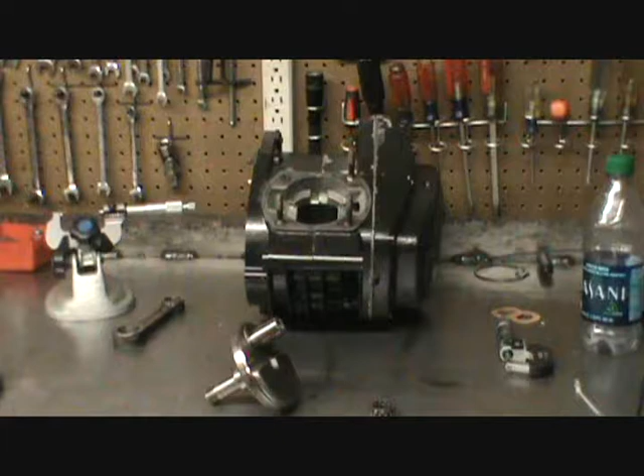My name's Steve. Today we're going to get started on our Can-Am 125 engine. I've already got the engine took apart. I wish I could have made some videos on that, but I'd already took it apart before I got into making videos, so this is where we're at right now.

I've took everything apart and cleaned it, and I started on the crankshaft last week. I was going to take it apart and put a new crank bearing and a new crank pin in, and check the rod journal to see if it was worn any. Well, I ordered a crank pin, found the right size and length, and a new crank bearing. So the rod, I measured it, and it miked out well within spec. It's hardly worn any at all.

So I just done a light honing, just to smooth it up a little. But the rod is actually in really good condition, so we're going to go back with this rod because Can-Am parts are not that easy to find. A rod, if you could find it, no telling how expensive it would be. So I'm glad that the rod was in good shape.

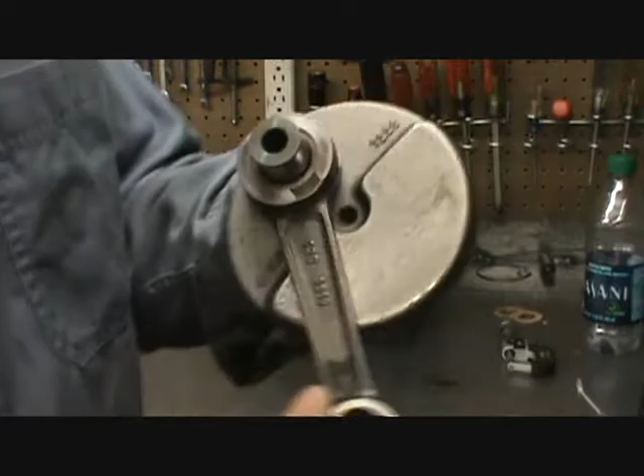Well, the problem is, I went to put the crank back together, and I noticed that the rod was rubbing on the side of the crank web. You can hear the noise, and let's see if that'll focus. You can actually see where the rod has been rubbing, see how shiny it is.

I noticed that there was no thrust washers on either side of the connecting rod, which is very unusual. Most all two-strokes that I've ever seen have had thrust washers on the side of the rods. So I thought, well, that was unusual, and I knew this right here couldn't work, because you can actually push the rod, and the rod will actually lock up on the side of the webs on the counterweights.

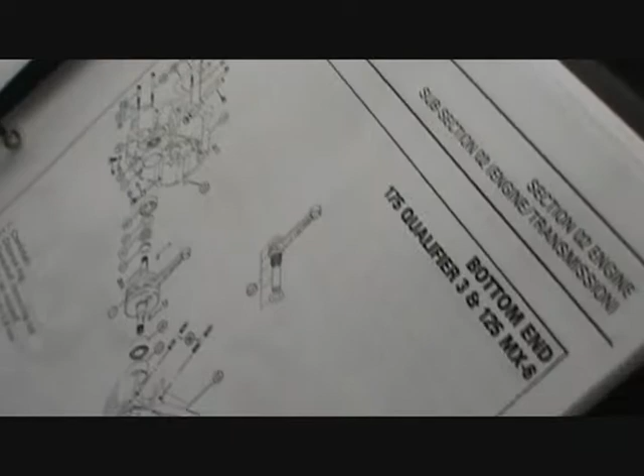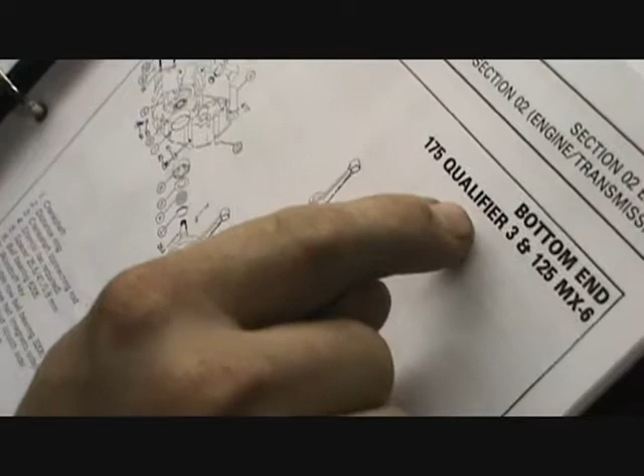So I found a service manual on the internet, and I bought it from a guy in Texas that deals with Can-Am parts. I looked in the breakdown, and it does have thrust washers, where it's supposed to have thrust washers. Let's see if we can get that to focus, and you can see right there that there are thrust washers on both sides of the rod. This is for the 175 qualifier and the 125 MX-6.

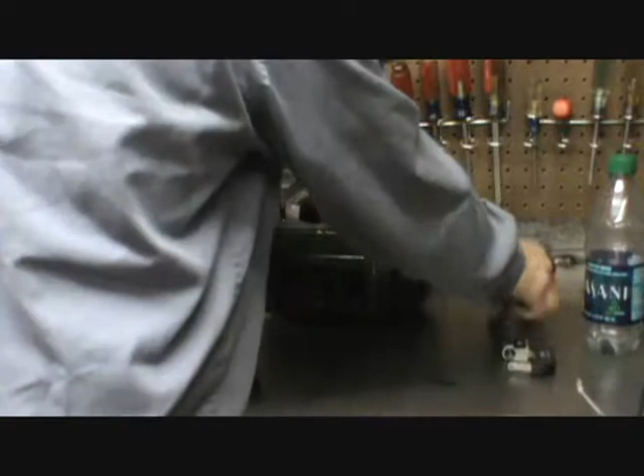So apparently somebody has had this crank apart years ago, and for some reason, I don't know why, they didn't put the thrust washers back in. It's very unusual, but that's what's happened. I had some thrust washers. I build a lot of crankshafts, so I try to keep some thrust washers on hand.

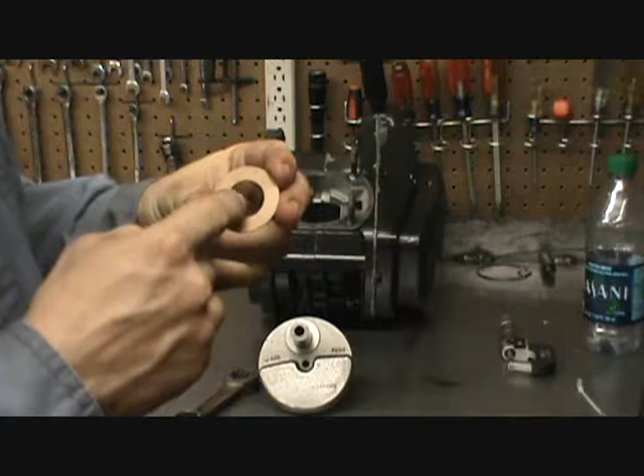But these that I have are 22 millimeters on the inside diameter, and my crank pin is 20 millimeters. So there's a chance that could work, but that may make some noise, and plus it will probably wear a groove in the crank pin over time with it flopping around like that. So that's not going to work.

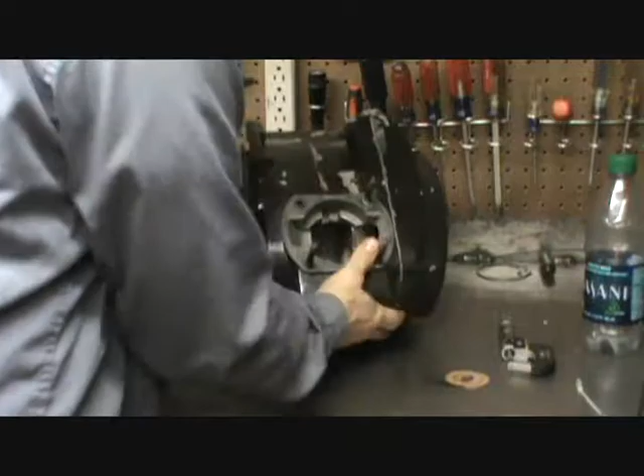The only concern I had was the width of the crank, what the final width of the crank would be once it had thrust washers in it, because this crankcase is very narrow. If you look inside there, you can see how narrow the actual crankcase is. So if you went with too thick of washers... because I don't know what the width of the original thrust washers would have been.

If you go with too wide of thrust washers, the overall width of the crank is going to be too wide and it's going to rub the crankcase. So today we're going to measure the crankcase and all the individual parts of the crank and rod to see what the width of the washers need to be.

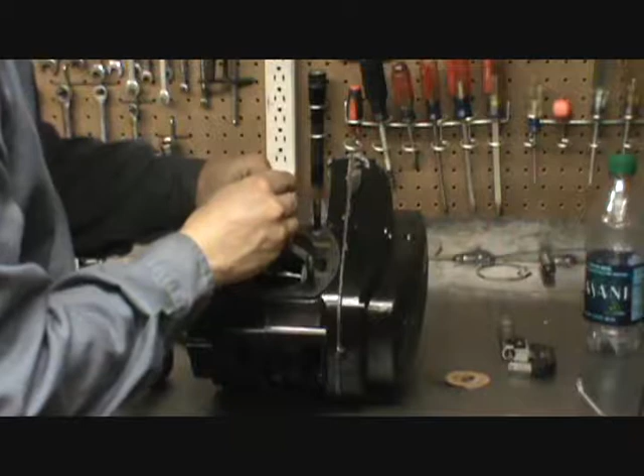First I'm going to measure the inside of the crankcase. I'm going to use a snap gauge to do that, to determine what the width of the case is.

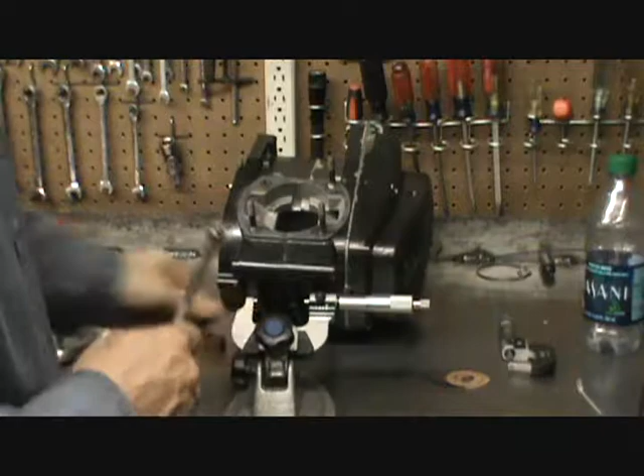I'm going to use the micrometer. Alright, we're going to come out with 1 inch 901 thousandths. So I'm going to write that down. Okay, that'll be our case: 1 inch 901 thousandths.

Now we're going to measure the width of the crank webs. Okay, we'll come up with 520 thousandths. We're going to write that down. They should be the same, but we'll check it anyways and make sure both sides are the same width, and they are 520 thousandths. So each web is the same width right here on the bearing surface.

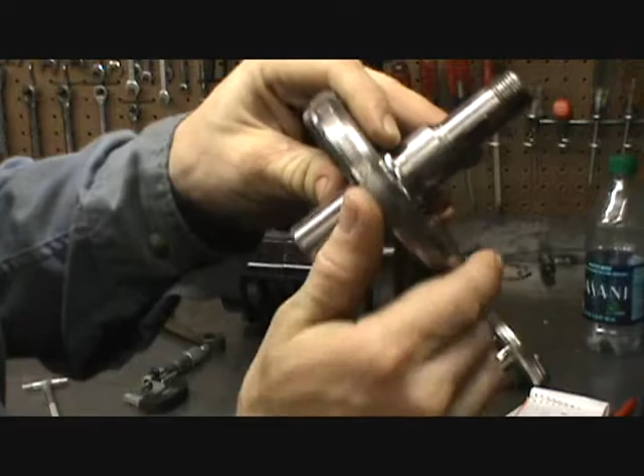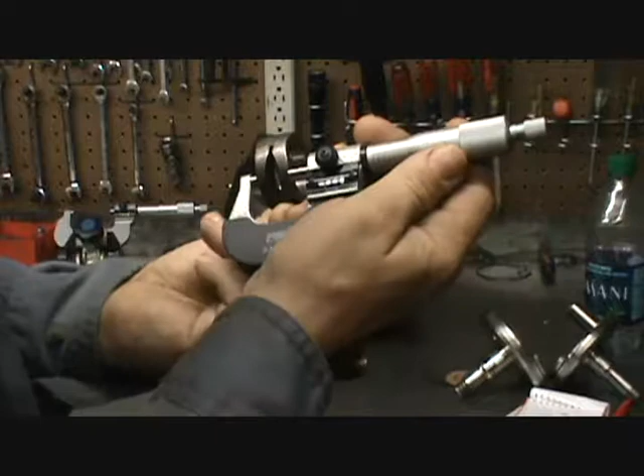Now we're going to measure the rod, the width of the rod, to determine what it is. Okay, we'll come up with 665 thousandths. Write that down.

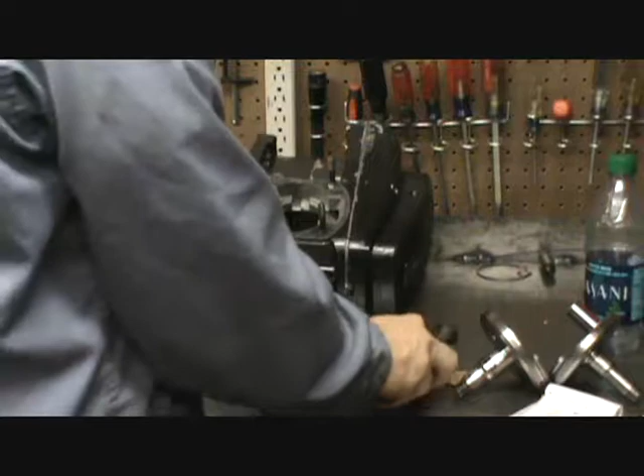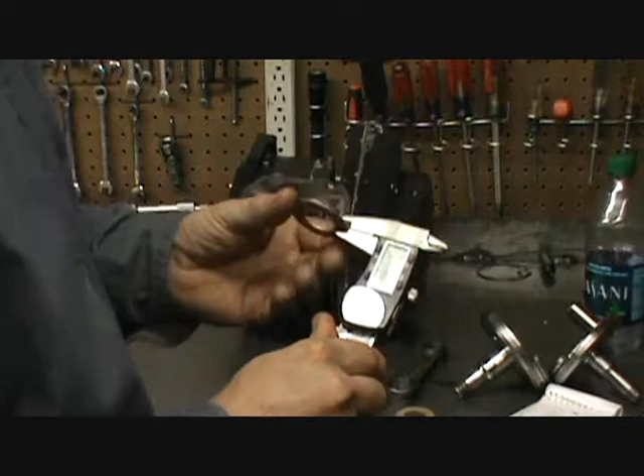Now, these washers that I have here measure about 40 thousandths. So we're going to add that. We're going to add 2 washers in, so that'll be 80 thousandths for the width of both washers. We'll just see if it works out by putting 40 thousandths thick washers in. So I'll write that down.

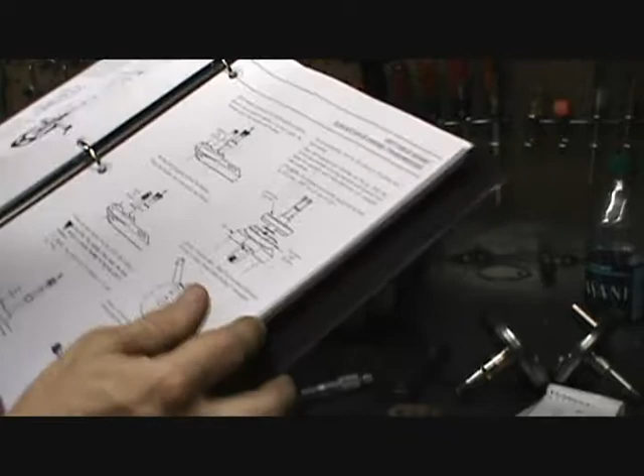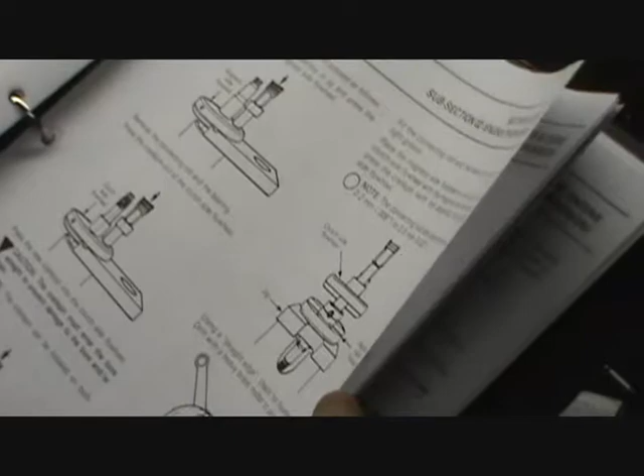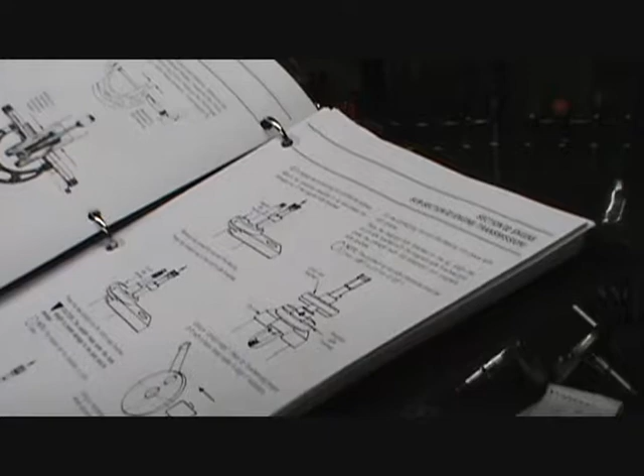And the side clearance - in the book here, the side clearance calls for anywhere from 8 to 20 thousandths. Most of the time on crankshafts I like to put them somewhere around 15 to 18 thousandths, that's normally what I go with. But just because the crankcase is so narrow on this engine, I'm going to put it down as 15 thousandths side clearance, and we'll add that together and see what we come up with.

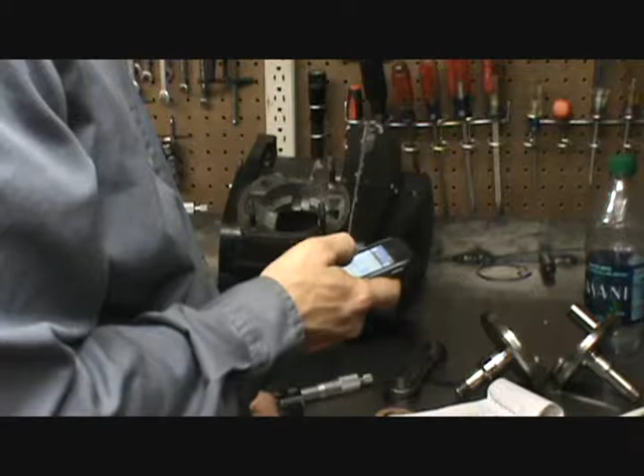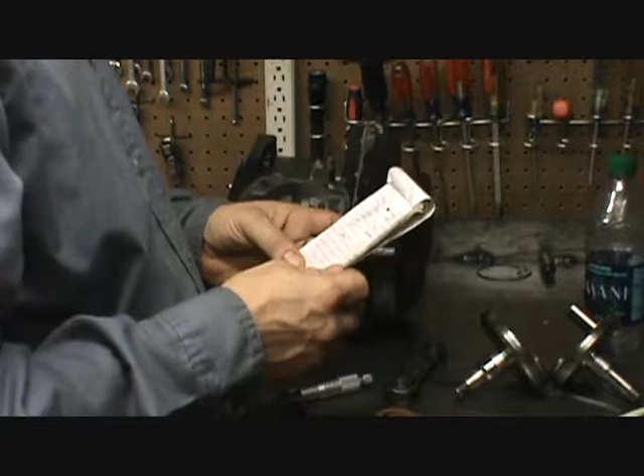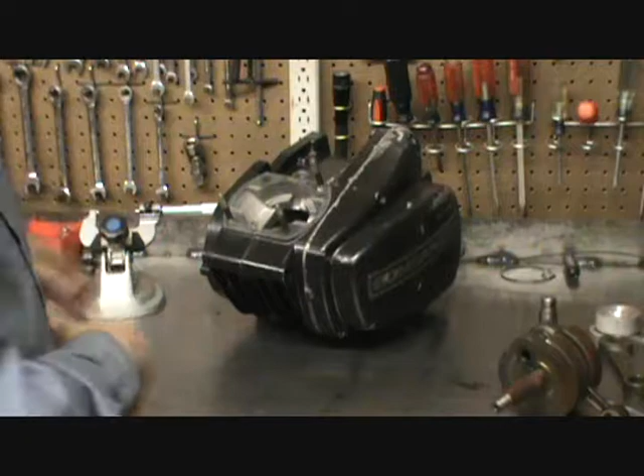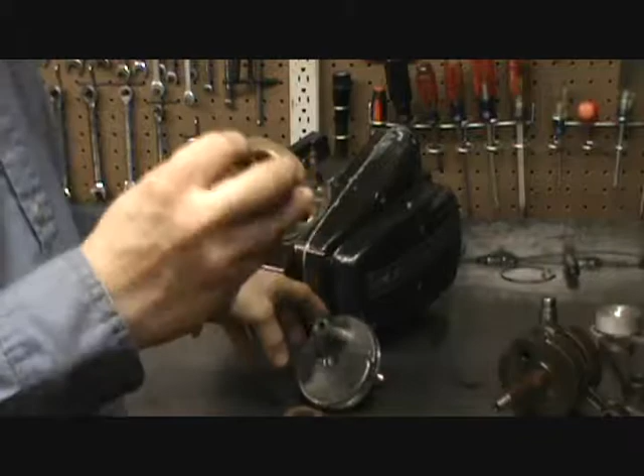Well, I looked through all the washers that I have, and I don't have anything that's 20 millimeters inside diameter and 40 thousandths thick. So I'm going to attempt to make some washers, some thrust washers, and I found this piece of brass that I had. I got several pieces of this, so I'm going to try to use this to make the washers.

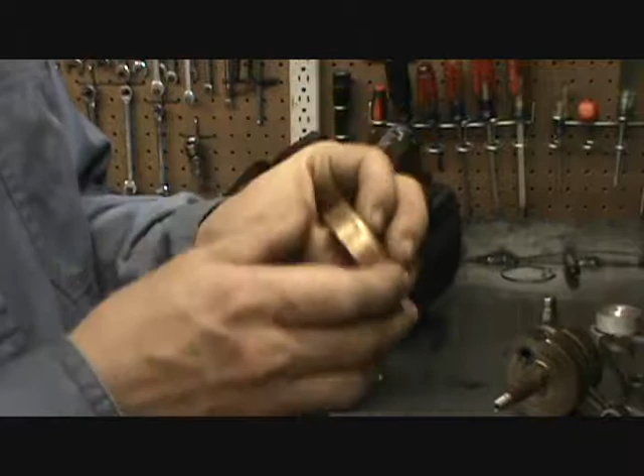The only thing I've got to try to figure out is some way of holding it in the lathe so that I can machine it. I'm going to machine the surface to start with, and then we're going to use a cutoff tool and cut it off roughly a little larger than 40 thousandths. Then we're going to have to flip it over and figure out some way of holding it to face the final size. It's going to be kind of difficult to hold because it's such a thin piece, so I'm going to have to think about it just a little while and figure out how we're going to do it, and we'll come back and get started on the lathe machining this out.